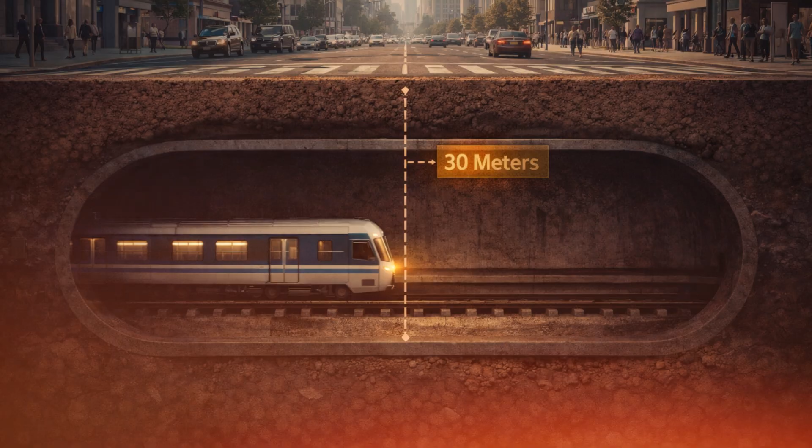Imagine you're standing on a busy city street. Beneath your feet, 30 meters down, a subway train is rushing through a concrete tube at 80 kilometers per hour. Now imagine an engineer walks up to you and says, "We could never build that tunnel any deeper. Not because of the money, not because of the machines, but because of mathematics."

That sounds almost impossible to believe. We live in an age where we've drilled through mountains, bored tunnels under entire oceans, and landed robots on Mars. Surely we can just dig a little deeper. But here's the thing. The ground doesn't care about your budget or your engineering ambition.

And when you understand what's actually happening beneath the surface, the physics, the geometry, the invisible war between pressure and structure, you'll realize that this isn't a technological failure. It's a mathematical wall, and nobody gets through it. Let's start from the beginning.

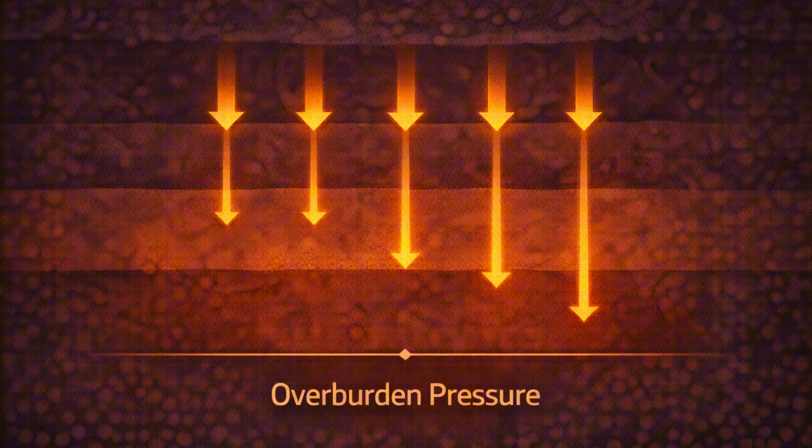The soil and rock around that hole have been sitting there under pressure for millions of years. Every meter of earth above pushes down on every meter below. This is called overburden pressure, and it increases roughly with depth. The deeper you go, the more weight is sitting on top of you.

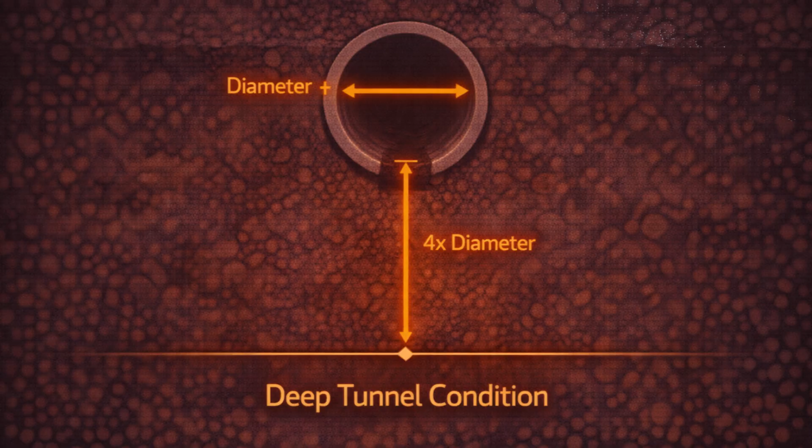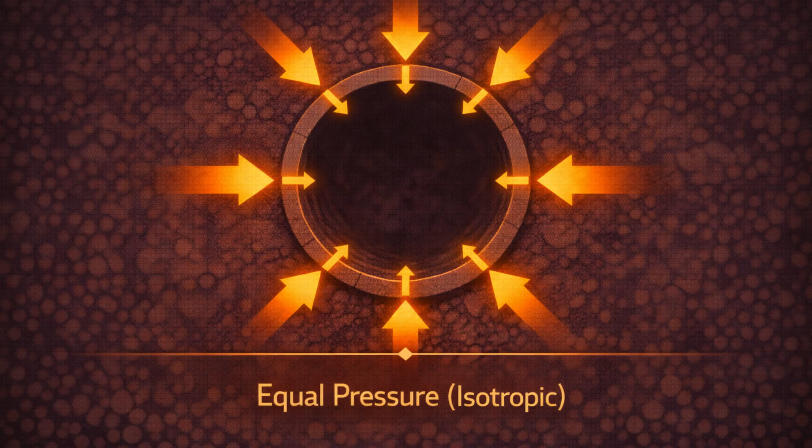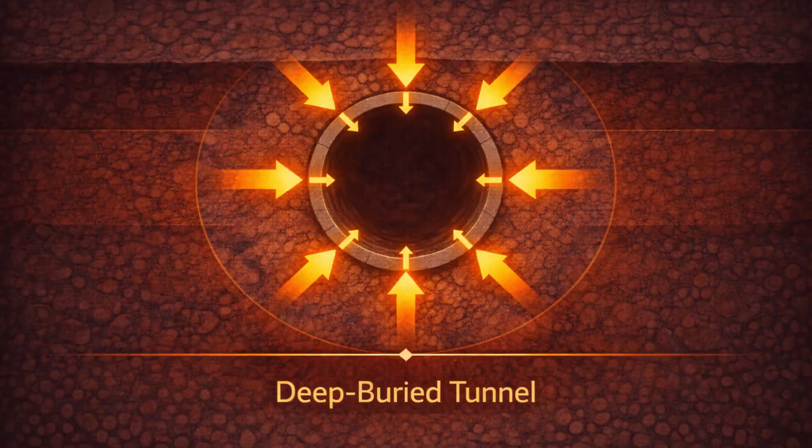Now, for tunnels with a depth of more than 4 times their diameter, constructed using a tunnel boring machine or drill and blast method, the pressure from surrounding ground acts almost equally from all sides, not just from above, but from the sides too. This is what engineers call a deep-buried tunnel condition, and it changes everything about how you design the lining, the concrete shell that holds the tunnel open.

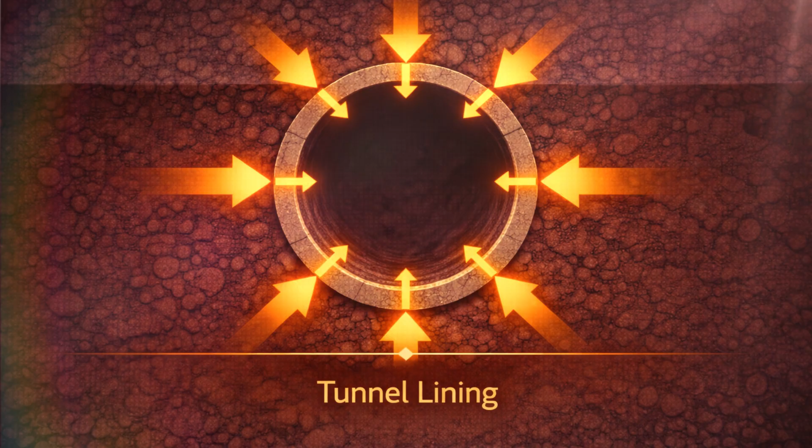Here's where the mathematics gets uncomfortable. The lining is the main structure of a tunnel, used to withstand the pressure of surrounding rock, and its thickness directly represents its load-bearing capacity. Makes sense. The more pressure pushing in, the thicker your ring needs to be.

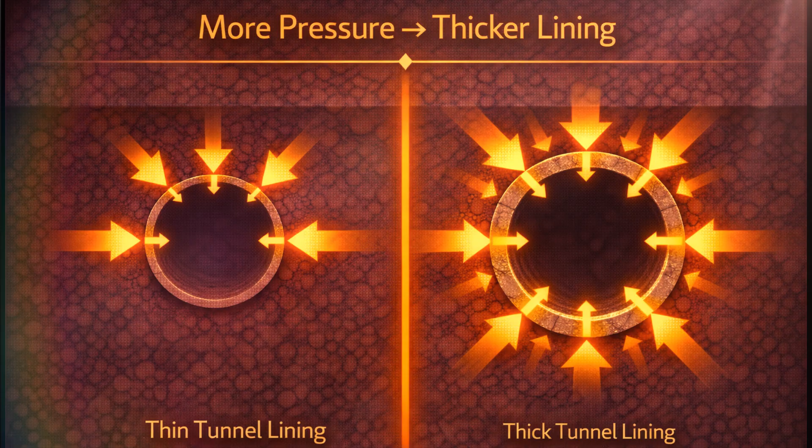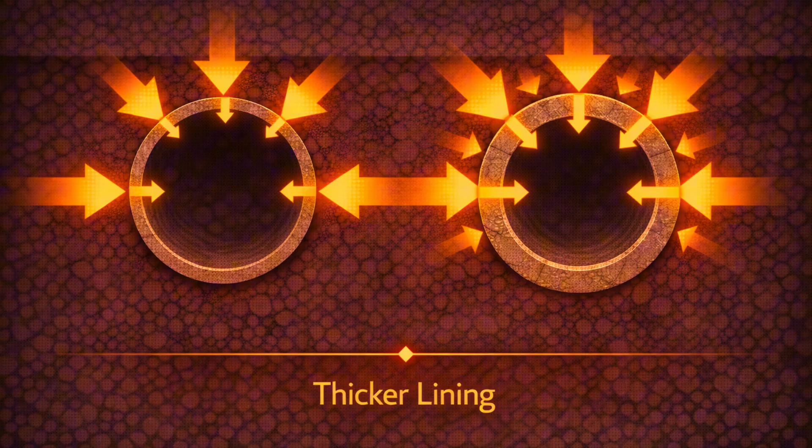But here's the trap. As you go deeper, ground pressure increases, so you need a thicker lining. A thicker lining means the inner diameter of the tunnel, the actual space the train uses, gets smaller. So you need to start with a larger hole to maintain the same usable space.

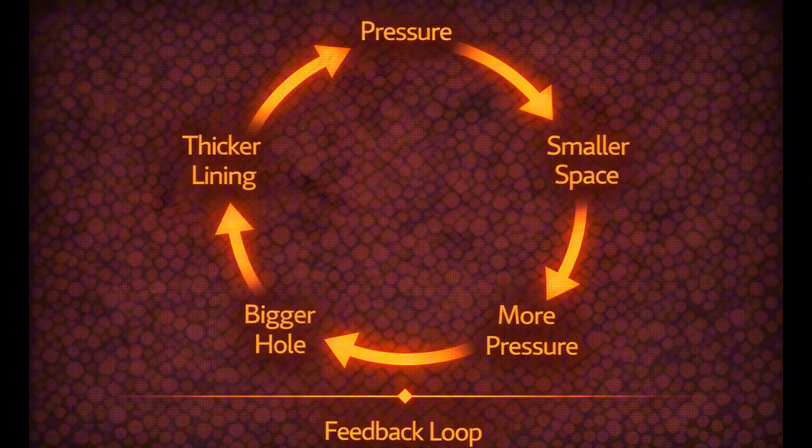But a larger hole means even more ground pressure trying to collapse it, which means you need an even thicker lining, which eats more of your diameter, which requires an even larger initial hole, which creates even more pressure. You see where this is going? It's a spiral, and it doesn't end.

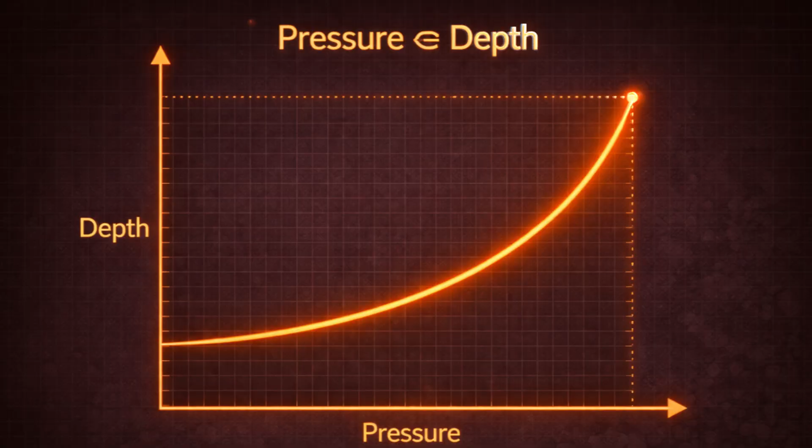With increasing tunnel depths, the distribution and magnitude of ground pressure acting on the lining changes dramatically, and the calculation of ground pressure depends directly on the depth of the tunnel. There is a theoretical depth at which the required lining thickness equals the tunnel's own radius. At that point, you have a solid concrete cylinder with no space inside. The tunnel has eaten itself.

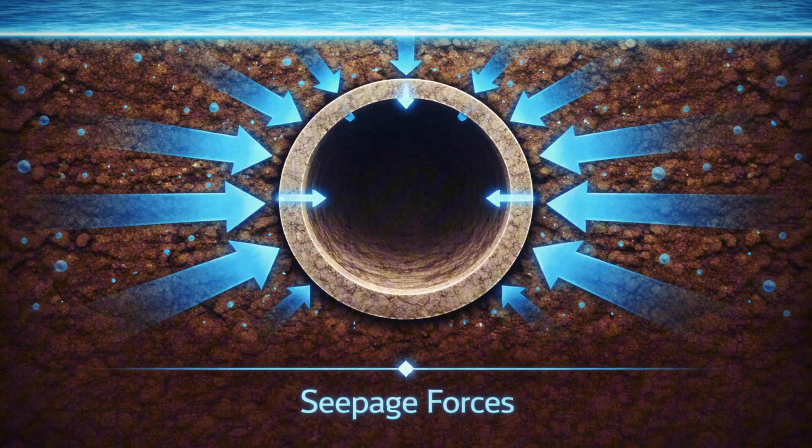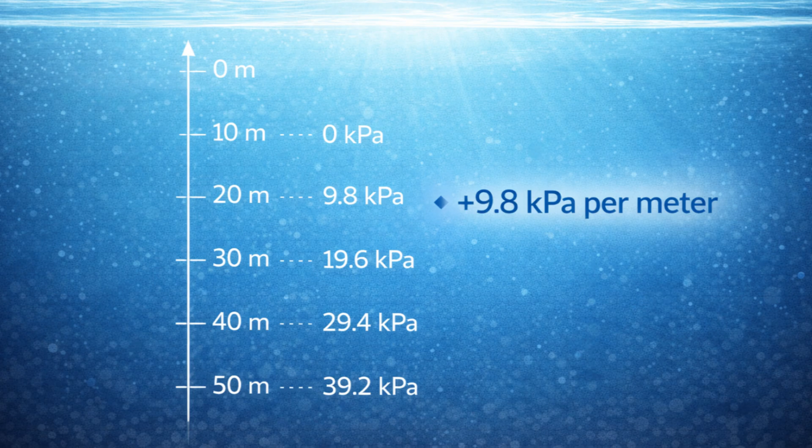When an underwater tunnel is excavated, groundwater flows in, especially when the infrastructure is located below the water table. The effective stresses around the tunnel are then affected by seepage forces. This is called hydrostatic pressure, and just like overburden pressure, it increases with depth. Every meter deeper you go, water pressure adds roughly 9.8 kilopascals to the force pushing against your lining.

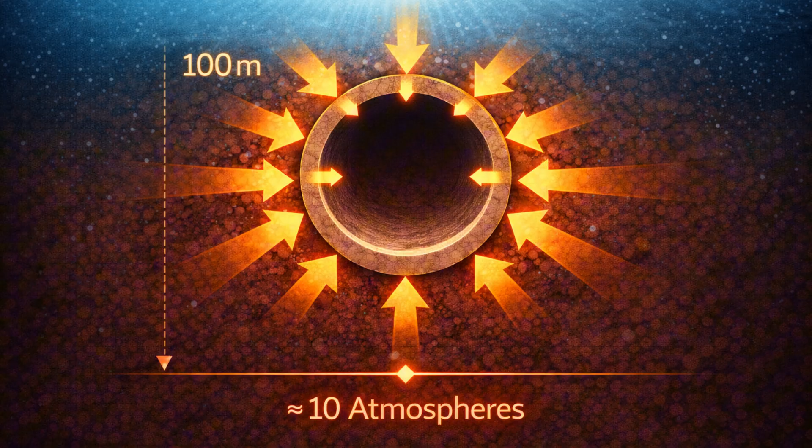At 100 meters down, you're dealing with water pressure alone of nearly 10 atmospheres. Your concrete ring is now being squeezed by both soil and water simultaneously, from every direction.

Tunnel structures are susceptible to complex groundwater and geological conditions, and in some special cases, it may be challenging for conventional lining to ensure the safety and stability of tunnels in the long term. This isn't a theoretical warning. This is what engineers have actually experienced on real projects.

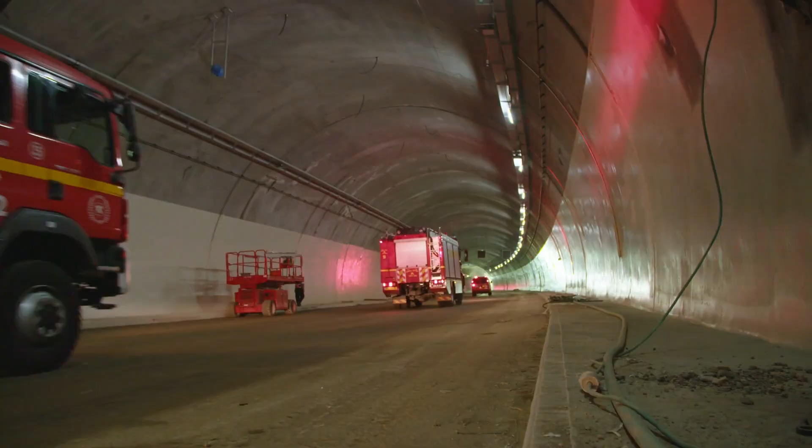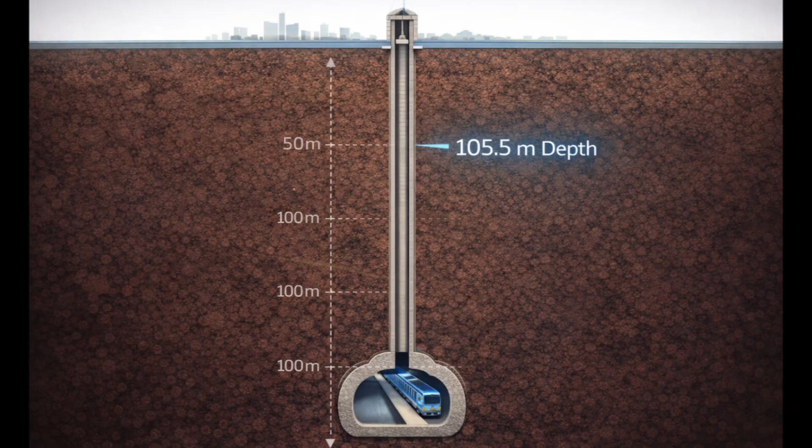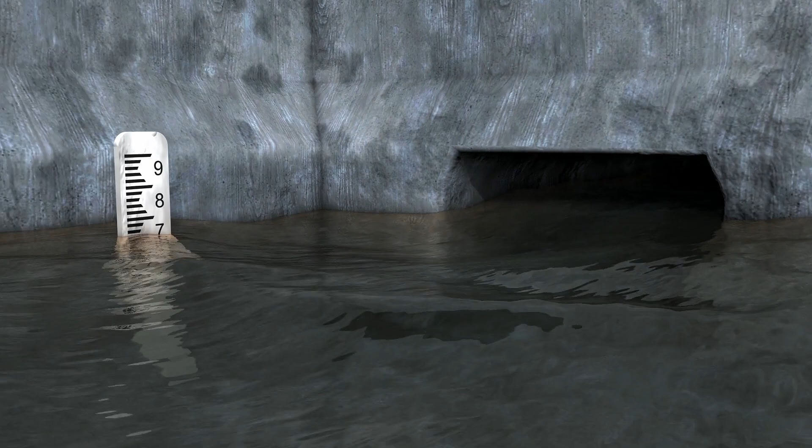Arsenalna station in Kiev is currently the second deepest metro station in the world at 105.5 meters, and its construction was a nightmare. The station was constantly flooded by underground waters despite its exceptional depth, which was originally intended to prevent flooding. Think about that. They dug deeper specifically to escape water, and the water followed them down.

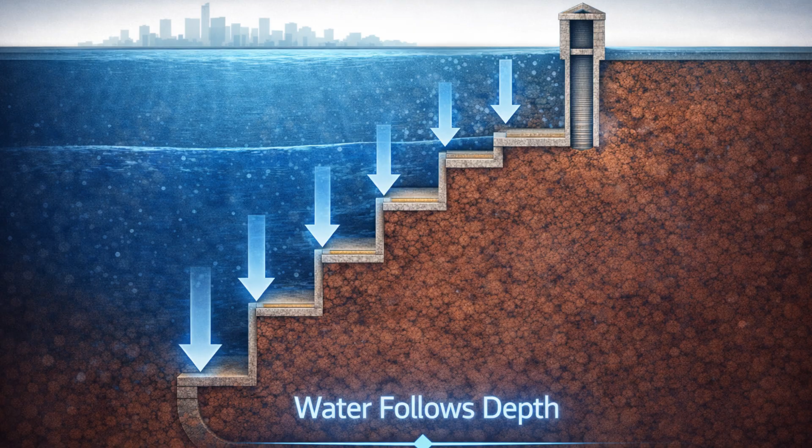To prevent the construction from caving in, the soil had to be frozen. Around a reinforced concrete ring weighing more than 3,000 tons, approximately 400 wells were dug and filled with liquid nitrogen. Liquid nitrogen, just to keep the dirt from collapsing while they built the tunnel. And the escalator ride from platform to surface takes a full 5 minutes, equivalent to descending a 32-story skyscraper.

That station works, but it is the outer edge of what is structurally viable with current materials, and it required extraordinary measures just to exist.

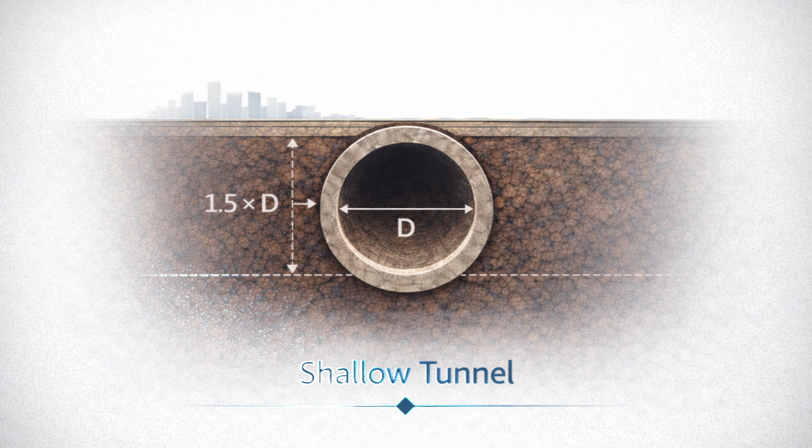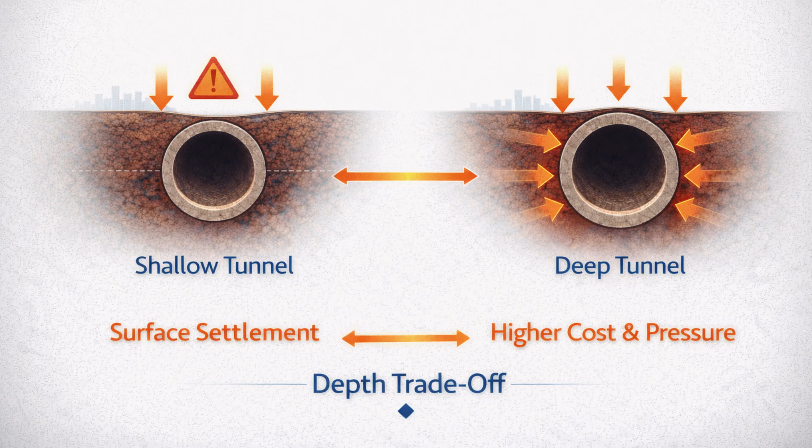A study published in the Bulletin of Engineering Geology and the Environment by Springer Nature, examining the Tabriz subway project, found that depths less than 1.5 times the tunnel diameter resulted in surface settlement above the allowed limit of 25 millimeters, making tunneling at those depths inadvisable. But the same study revealed that going deeper creates its own cost and structural spiral. Construction costs are highly dependent on the station depth and the distances between stations.

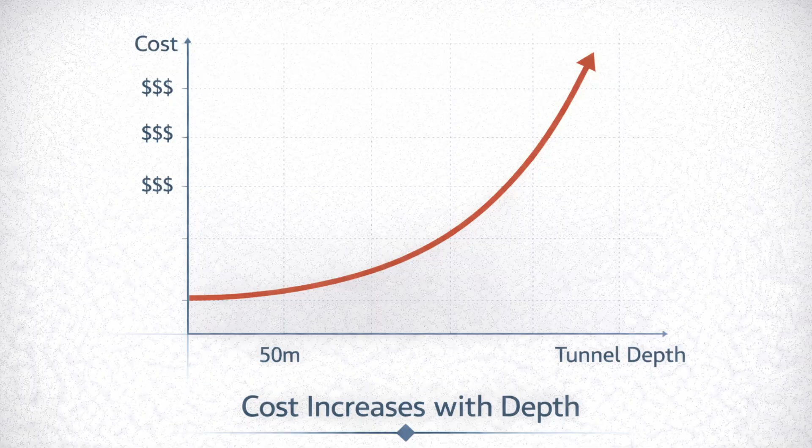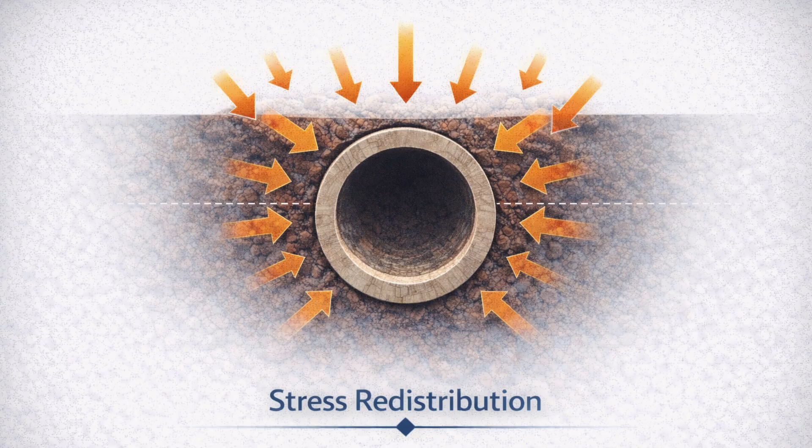Meanwhile, research published in Scientific Reports, Nature, on deep buried tunnel linings confirmed that after deep underground excavation, the three-dimensional stress state of surrounding rock undergoes complex changes, including stress unloading, concentration, and deterioration of mechanical properties. In plain language, the rock itself starts behaving differently the deeper you go. It creeps, it flows, it pushes back in ways shallow tunnels never have to deal with.

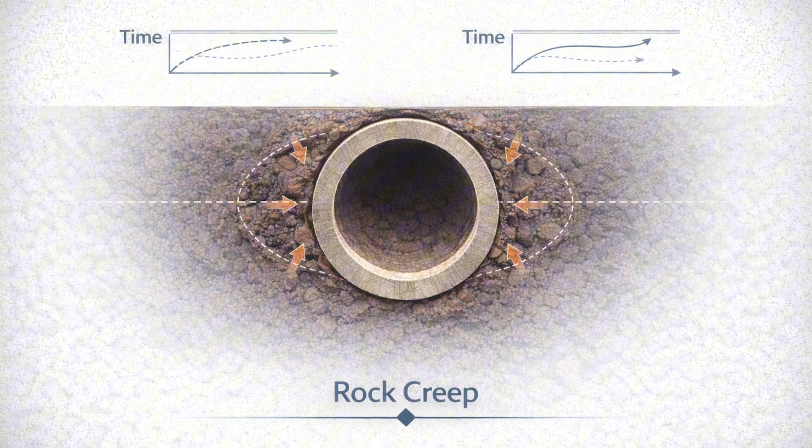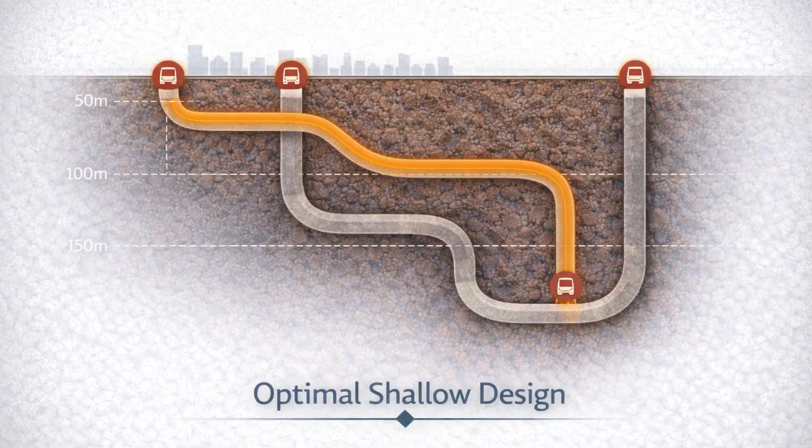This is why modern urban metro systems are almost universally optimized for the shallowest feasible alignment, to reduce cost and improve passenger access, unless unavoidable constraints force them deeper. We don't build deeper subway tunnels, not because we lack the drills or the ambition. We don't build them because the mathematics of pressure and geometry sets an absolute limit.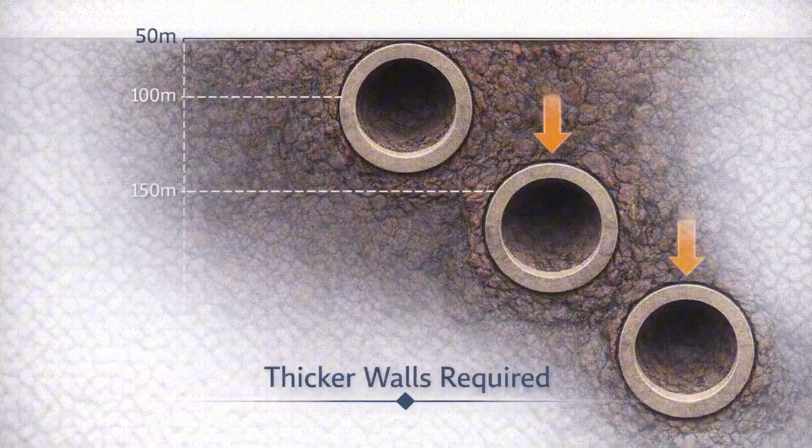The deeper you go, the thicker your walls must be. The thicker your walls, the less tunnel you have. And at some point, the numbers simply stop working. It's not a failure of technology, it's a hard constraint baked into the physics of how solid matter behaves under pressure.

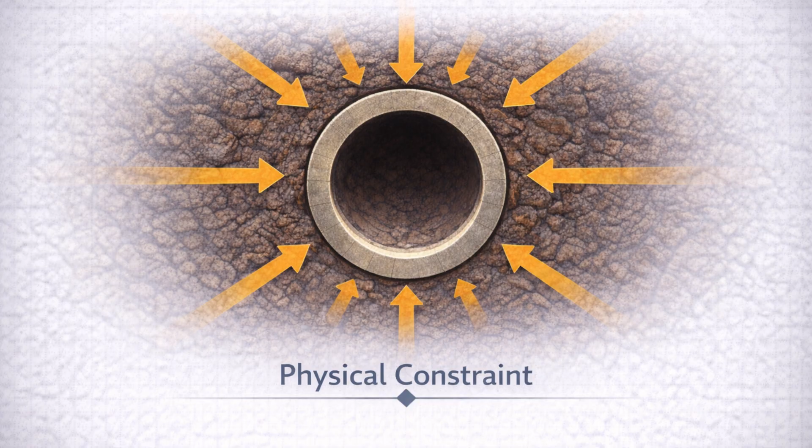Every subway train you ride is moving through a tube that exists in a careful negotiation with the earth pressing against it from all sides. Engineers calculated exactly how thick the walls needed to be, and left just enough room for the train. A few more meters down, and there would have been no room left at all.